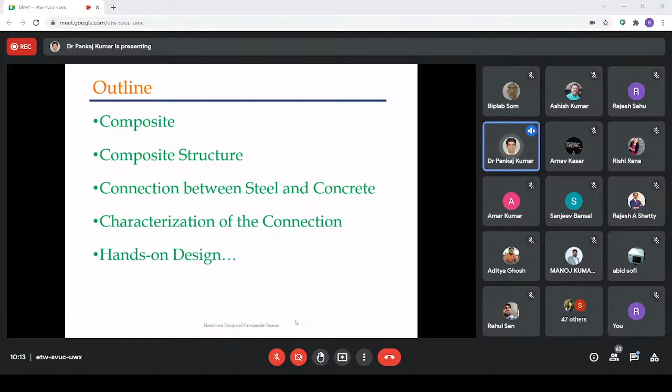Next we will discuss connection between steel and concrete, and after that characterization of connection. Whenever we ensure connection between steel and concrete to make them composite, usually there are different kinds of connectors available in the market, and we can also develop different kinds. How we can take the best advantage of each part, as well as perfect or complete capacity utilization of connections, based on our requirement. Sometimes we look into performance, sometimes strength, sometimes both aspects. In that case, which kind of connections are most suitable, because different connectors at the interface level of steel and concrete have different properties. At the end we will discuss one design example.

This is common whenever we look into steel concrete composites in civil engineering aspect. Firstly they were invented to accommodate large spans, because whenever we look into the largest spans, if we go with RCC, there are lots of challenges like the geometrical requirement, and the size and economy is also a concern.

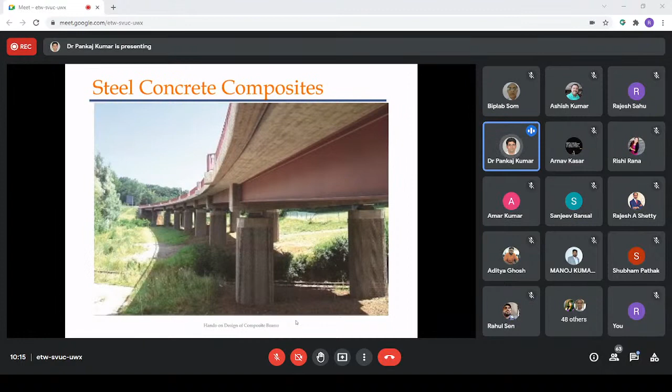If we look into the classical form of connections, usually at the initial development stage, likewise 70 years back in 1950 or early 60s, they started to make connectors, or connection between steel and concrete, at the start of steel concrete composite. They made it with reinforcement bars, but after that they found some challenges in it. There were resistance issues, and some uplift pressure also, because there was no resistance section. Therefore, they introduced headed kind of connectors to ensure the connection integrity between steel and concrete.

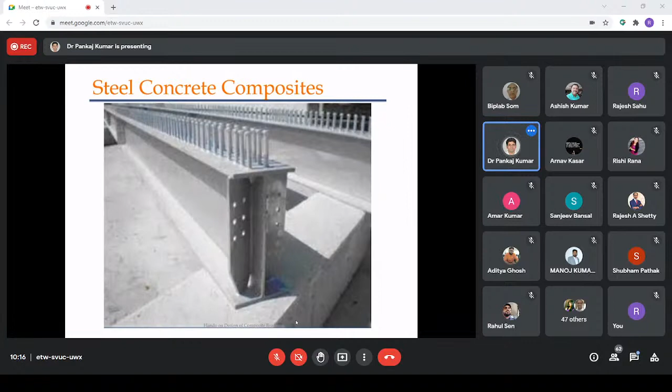In this particular picture, one steel beam is available, and at the top flange of the steel I-section, the mechanical shear connector, specially headed stud, is connected in two rows. These two rows are in line. We can connect them in staggered patterns also.

Therefore, steel undergoes deformation in the initial stage also. After a certain time period, once the concrete has hardened, it also contributes to strength, but at the initial stage there is no strength available, so the steel sections undergo deformation. To avoid that deformation in steel at initial stage, we usually use propped construction. If we are not using this vertical shoring, we can say it is an unpropped construction.

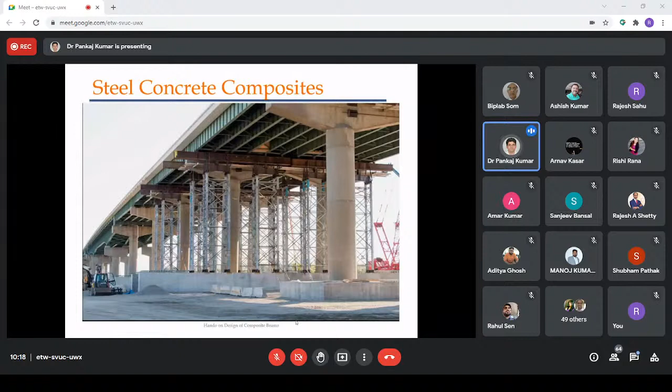Sometimes we use cambering also, but usually when moment occurs at the connection, cambering is not possible, and it affects the aesthetic view also, and it is difficult to provide a camber in such large sections. Therefore, we usually go for propped kind of construction.

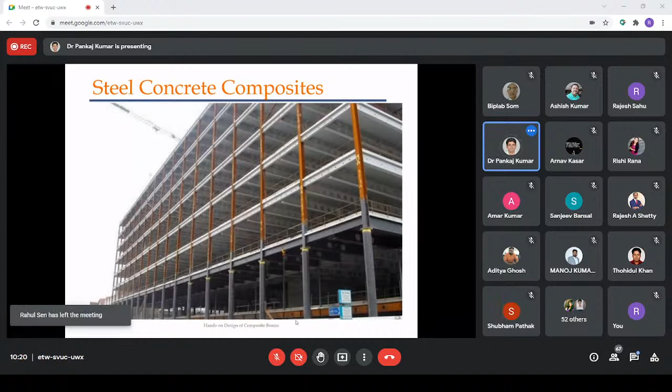When we are looking into steel, concrete, composite, we have two different components. One is steel and the second is concrete. If we look into these two components, we have different elements in each. If we look into steel, especially I sections, we have flange and web sections. Looking into concrete, we have reinforcement and plain concrete also. First we will discuss properties and some advantages, disadvantages and behavior of steel, and after that we will go for composite.

In composite construction, usually we are using steel, and we are using different kinds of sections. Some common sections are I sections, sometimes we use channel sections, sometimes angle sections, based on our requirement and sectional property requirement, or moment rotation requirement, or ductility requirement.

Looking into the advantages of steel: it has good reliability, industrial behavior, it requires lesser construction time, and because of that we get greater erection speed. Steel has higher strength in compression as well as in tension, and the strength in compression and tension is almost similar. Strength-wise, it is lightweight in nature.

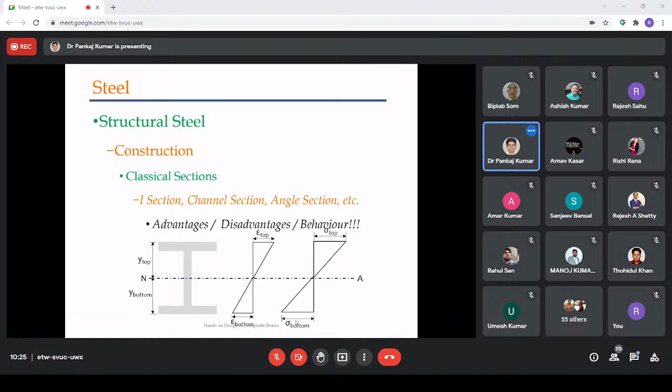Similarly, concrete, when we look into reinforced concrete, it is usually cast in situ. There are some advantages of concrete, like we can mold it into any shape and size because of its semi-liquid nature. Looking into availability of materials, we can get it locally, similar to steel as compared to steel sections. Steel sections have to be ordered and we get them from industries only, but we can generate or produce concrete locally, and it can be molded into any shape.

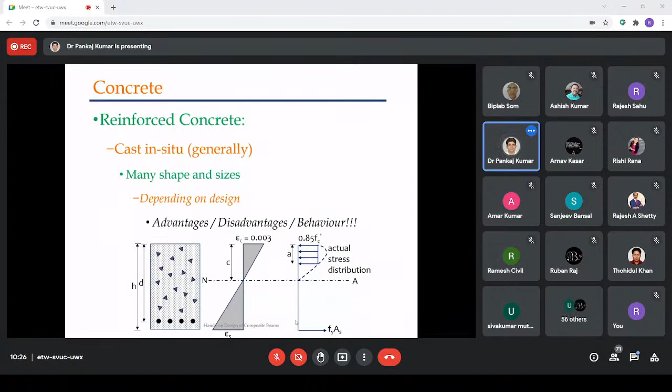Skilled labor is also not required. Similarly, if you look into steel connections, they require skilled labor. Again, as compared to steel, reinforced concrete has better fire resistance.

If we look into some aggressive environmental conditions, as compared to steel, concrete provides us better durability, and it also acts as a thermal insulator, requiring less maintenance.

Similarly, if we look into the disadvantages, there is no tensile strength. Concrete is very good in compression, as we know, but it shows very less strength in tension. Therefore, these are some disadvantages of concrete.

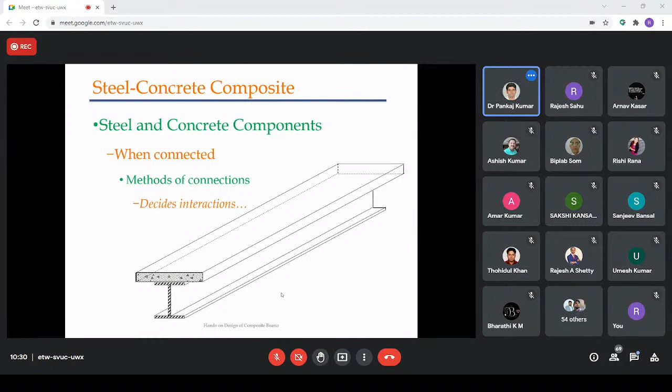So whenever we are talking about connectors, we are talking about shear connectors only. In some cases, if the deflection is very high, they are subjected under bending also, but more or less they are subjected under shear only. Based on interaction, we can decide how much amount of slip we are allowing at the level of interface.

So here we will talk about some advantages of composite over conventional reinforced concrete.

So first is high strength to unit weight ratio. If we construct an RCC beam with the same moment of inertia, we require a very high amount of concrete, and if we go for steel, we require lots of money. Therefore, to take the best advantages, we use composite, and because of composite, we get a high strength to unit weight ratio.

Next is flexibility in construction, which is also available in case of composites, and ease in construction, ease to repair, ease to retrofit, and it is partially reusable also. As we know, if there is dismantling going on in any steel concrete composite member, we can reuse steel. Steel is also a reusable material. Similarly, right now, because of advancement in concrete, concrete is also reusable, because they are using recycled aggregate and all.

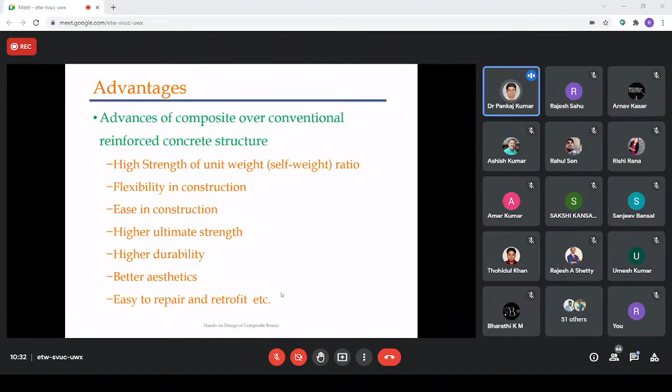Next is high ultimate strength, and one more thing is high durability, and we are getting better ductility as compared to concrete. That is again one of the advantages of composite over conventional reinforced concrete. This is also one of the advantages, because of the openings available in the steel beam web, we can insert all the utility pipes, all the arrangements within the beam portion only. This is not possible with conventional reinforced concrete systems.

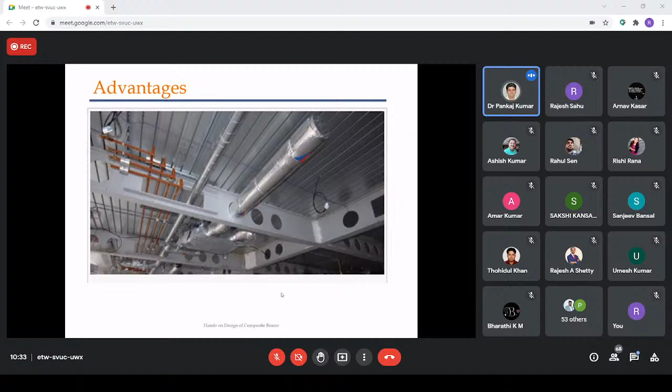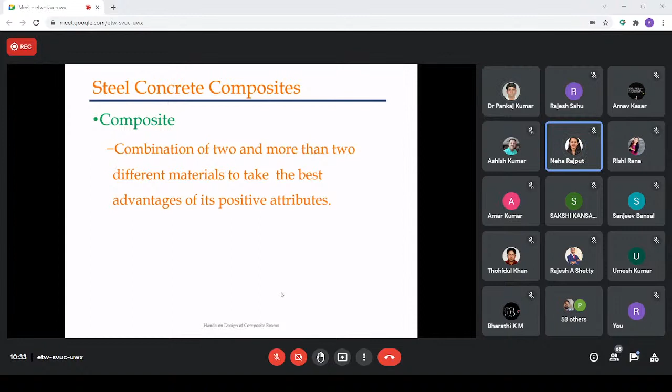So this is the typical definition of composite, when we combine two or more different materials to take the best advantages of their positive attributes, they are known as composite. And this is the comparison between composite as well as non-composite sections.

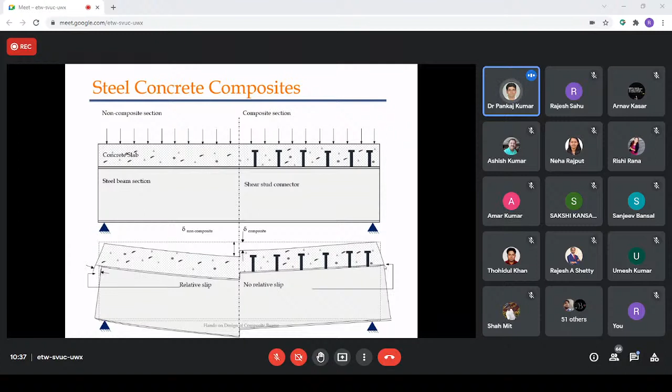Here is a point: non-composite beams show more deflection while composite beams show less deflection. Why is this? When we look at deformation, we are talking about moment of inertia. Deflection is inversely proportional to moment of inertia.

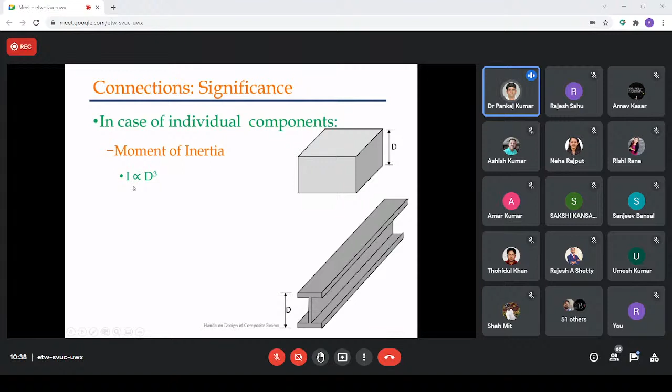If I take any section, rectangular, prismatic, or I-section, there is always some coefficient, but moment of inertia is directly proportional to d cube. If I'm putting a concrete slab directly over a steel beam, or two components one over the other without any interaction, the total depth equals 2d, but the moment of inertia is d cube plus d cube. So moment of inertia is directly proportional to 2d cube because there is no interaction between steel and concrete.

If I take the same section but with a connection, they act as a single unit. The total depth is still 2d, but now the moment of inertia is 4 times the previous one, which is 8d cube. So you get considerably lesser deflection compared to the non-composite section, because deflection is inversely proportional to moment of inertia.

With composite action between steel and concrete, the depth is not independent for concrete and steel separately, it is combined as 2D. Therefore I is directly proportional to 8D cube. Previously, for the same section with no connection, it was D cube plus D cube, which is 2D cube.

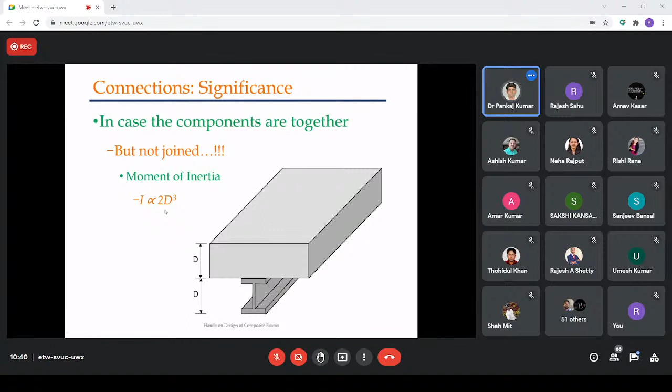That is why composite sections are more economical.

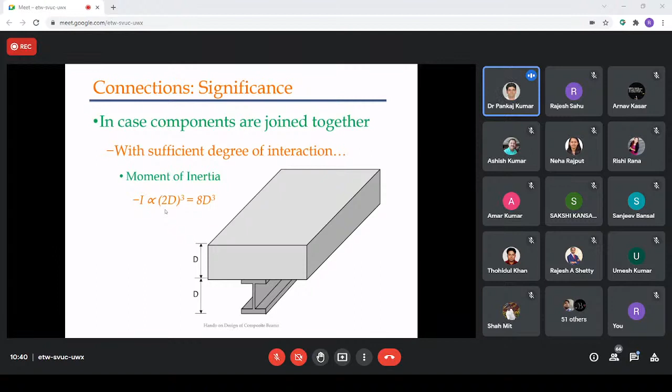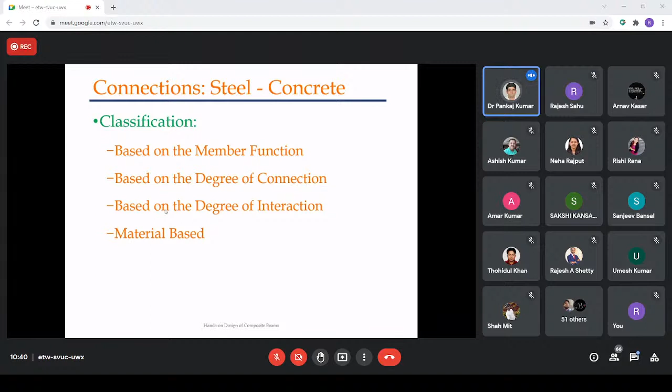Next is connection. We can classify the connection between steel and concrete based on four different criteria: member function, degree of connection, degree of interaction, and material type. Based on member function, since different members in any structure serve different purposes, we can construct sections using composite action but classify the connection based on member function.

The first one is a column in which concrete is encased with a steel hollow core steel circular section.

The second one is also a column section in which concrete is partially confined with a steel I-section.

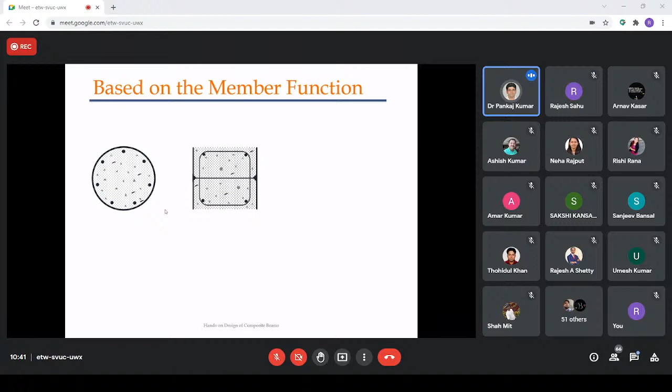The third one is a typical example of a steel-concrete composite flexural member or beam section, in which concrete is placed over a steel I-section and connected with headed stud shear connectors. The next one is also a typical example of a steel-concrete composite floor system.

As I showed in a previous slide, the third or fourth slide, we can provide some passive reinforcement below the concrete slab, or floor system. This profile sheet acts as your passive reinforcement, and the arrangement looks like this.

We can arrange it at different angles also, and based on that we can calculate the effective section of the composite member. In the case of profile sheets, we can arrange them in longitudinal rib placement, transverse rib placement, or oblique rib placement.

In this particular case, looking at the cross section, it is a longitudinal placement. If I rotate it 90 degrees, I get a different soffit height, and if I place it at an inclined angle, I get a different soffit height again. That is known as your haunch height.

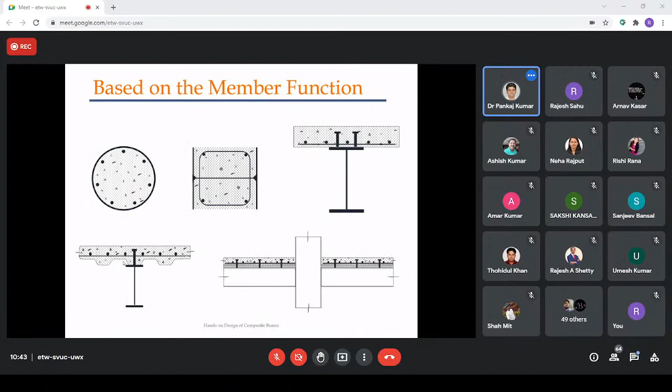So next is, this is based on member function. Next one is degree of connection. Degree of connection means, based on degree of connection, we can categorize connections into different categories. One is partial shear connection, second one is full shear connection,

and third one is no shear connection between them. So the degree of connection is totally a strength based criteria in which we are ensuring connection between steel and concrete, whether there is a connection available or not, and if the connection is available, then the strength of connection is higher than concrete or higher than steel or higher than both of them. If the strength of connector is higher than concrete or steel, in that case we can say the connection is full shear connection. And if the connection strength is lesser than minimum of concrete or steel, in that case we can say it is partial shear connection. You got it?

So as we know, degree of connection is a strength based criteria. It means we are calculating strength of three different members. One is strength of RCC or strength of concrete slab, second one is strength of connector, and third one is strength of I section.

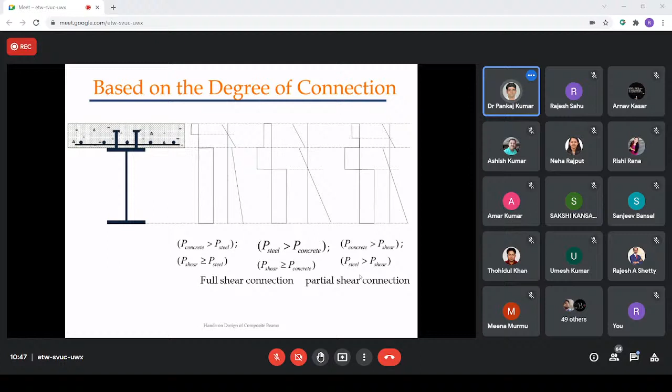Similarly, looking at the third case, strength of concrete is also higher than strength of shear connector, and strength of steel is also higher than strength of shear connector. Therefore, the shear connector will fail first. So this is known as partial shear connection. So therefore, whenever we are applying this, degree of connection can go beyond 1 also.

Similarly, if we look at degree of interaction, maximum value of degree of interaction is 1 and minimum value is 0. So degree of interaction is a stiffness based criteria. Therefore, we define it by slip at the level of interface. If I'm talking about slip, as we know, the change in slip is the difference of strain in steel and strain in concrete.

If I'm considering in the x direction, and denoting slip by s, then ds by dx, which is the change in slip, equals the difference of strain in steel and strain in concrete, es minus ec or ec minus es, anyway. So that is your strain.

So based on slip or change in slip, we can define three different kinds of degree of interaction. One is full interaction, second one is partial interaction, and third one is no interaction. In full interaction, what happens? The relative slip at the level of interface—although we are applying some connector at the level of interface—if we say there is full interaction, it means the stiffness of connection is infinite. As I told you, degree of interaction is a stiffness based property. Therefore, the stiffness at the level of interface is infinite, so there is no change in slip at the level of interface.

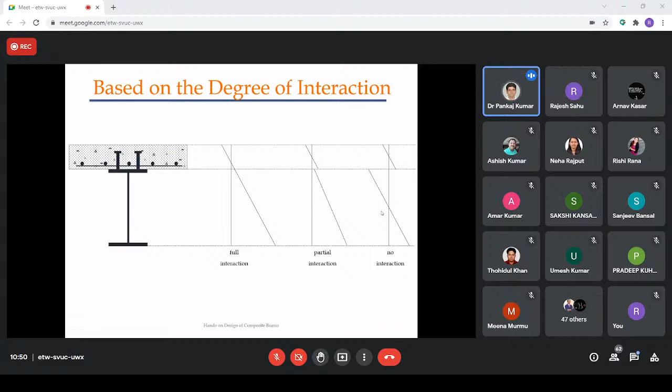There are some advantages of mechanical shear connectors and some advantages of adhesive connection also. Whenever we apply a mechanical shear connector, we get a semi-rigid or flexible kind of connection. But when we apply structural adhesive at the level of interface, our stiffness goes up to near infinite, so in that case there is no interfacial slip visible at the level of interface.

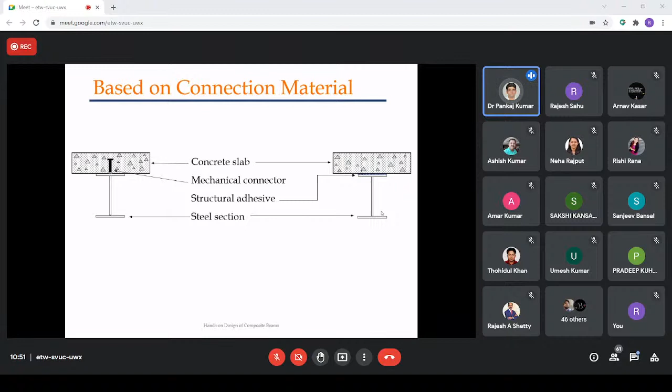So as I told you when discussing connecting material, one is mechanical kind of connector. They fall either under semi-rigid or flexible connector based on degree of interaction, and one is rigid kind of connection, which we can usually ensure by adhesive bonding. For that we can use any kind of epoxy bond, and this is also explained by the load relative slip curve.

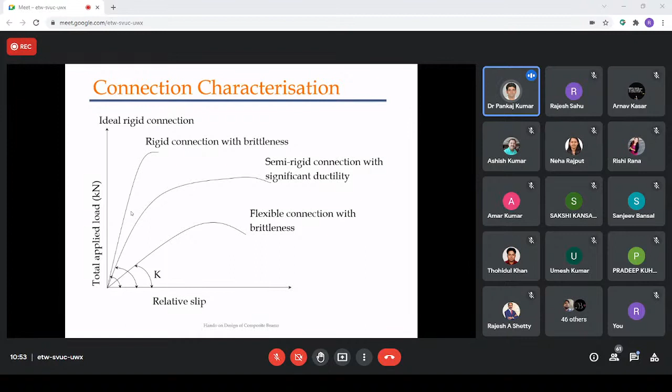If you look into the stiffness for flexible connection, it has brittleness, and the stiffness of the load-slip curve is very less compared to semi-rigid and rigid connectors. Moving upward, we get semi-rigid kind of connector, and at the end we get rigid kind of connector. Rigid connectors are very brittle in nature because they don't allow any relative slip at the level of interface, meaning the nature of the connector is brittle. If the connector is not brittle, it means it will allow some amount of stiffness-related deformation at the level of connectors.

Next is structural demand. For a structural member or structure, we need requisite stiffness, adequate strength, and sufficient ductility. These are the three demands of any structural member.

So we can ensure the requisite stiffness based on material, and that is based on elastic modulus, because as we know the slope of the stress-strain curve is elastic modulus, and that represents your elastic modulus, and the shape of the structural element also.

If I'm looking into adequate strength, that is based on member function, such as truss, beam, column, slab, beam-column connections, and so on. Different kinds of loading also affect the strength of the member, whether it is force kind of loading or displacement kind of loading. Some typical examples of different loading are static, cyclic, reverse cyclic, dynamic, impact loading, wind loading, and earthquake loading.

The next demand is sufficient ductility. So whenever we are looking into a composite material, we are looking for three different things: required stiffness, adequate strength, and sufficient ductility. These are the three key parameters to design a structural member at any level.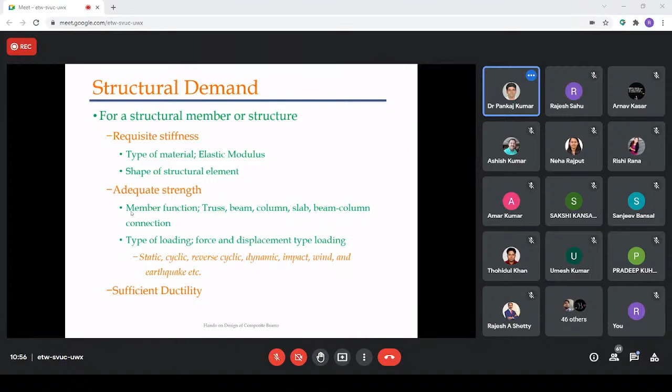This is about structural demand, stiffness and strength influence. If you are increasing the strength of connection, you are getting more strength, but you are getting lesser ductility. Based on that, three different kinds of structures are defined on the force deformation curve. As I told you, at the end, we will ensure the ductility in structural member.

So design criteria for ductility: one is analysis requirement, and second one is detailing requirement. Ductility, as we know, is the ratio of total deformation to yield deformation. This is the point from where initial yield starts to the ultimate point. This is the ratio of deformation between these two points.

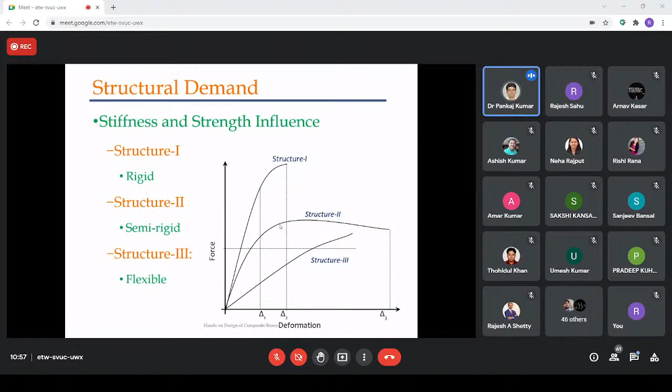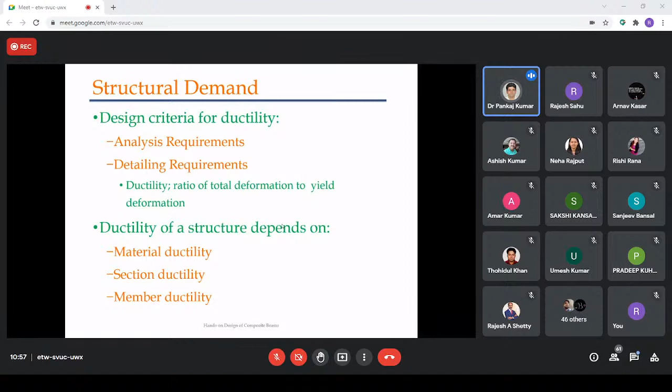We call steel as more ductile as compared to concrete, because we are getting very good ductility in case of steel. And ductility of structure depends upon, as I told you, material, cross section, member, and at the end we can ensure it in structural member also.

Next is different kinds of shear connection. As I told you, we can ensure the composite action between steel and concrete with the help of connection. If I'm looking into the connection, we have different kinds of connections. Based on material, we can classify them into two categories: one is mechanical and second one is adhesive bonded. In mechanical, we have different kinds of connectors, like channels connector, L-shaped connector, T-shaped connector, headed connector.

Demountable kind of connector is a new concept. It emerged in the last 10 to 15 years. There's also perfobond, T-perfobond, Cristbond, Y-shape, J-shape, and usually based on the requirement, researchers are developing different kinds of connectors.

The last one is adhesive bonded, because whenever you are inserting any kind of mechanical shear connector at the level of interface, you are getting some amount of stress concentration at that level. To eliminate the stress concentration issue, you can use adhesive bonded connections, but adhesive bonded connections also have some limitations.

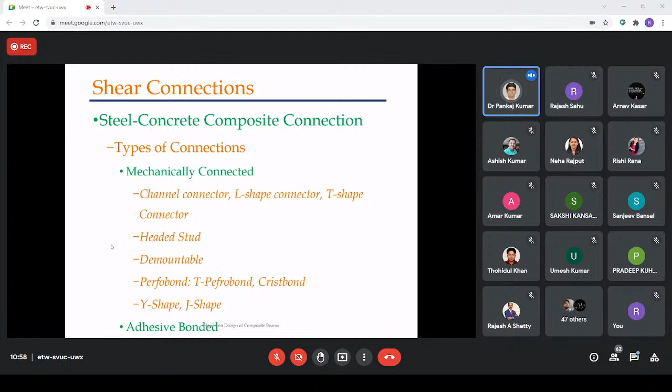Likewise, we can ensure the connection only between the interface. In mechanical shear connection, the connector is always embedded inside the concrete. Therefore, we cannot rely on the superficial property of concrete as well as steel. That is an issue with adhesive bonded kind of connection.

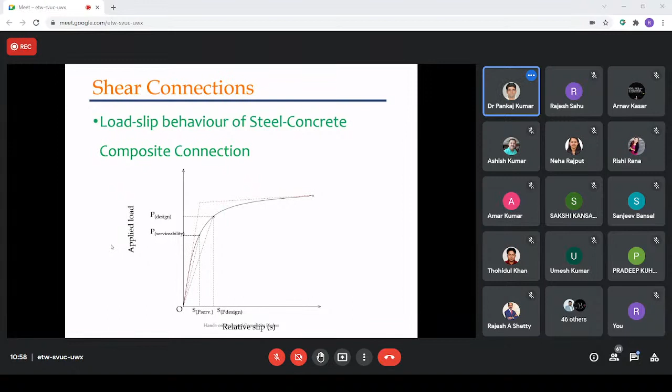This is the typical load slip behavior of composite connections. And these are the typical pictures of different kinds of mechanical connectors.

The first picture is angle shear connector. The placement of angle can be made in two different ways: one we can put parallel at top, and one we can put parallel at bottom. If you are putting it in the first position, or figure A position, you will get better resistance. If you are putting it in the second position, you will get lesser resistance, or you can say you will get more uplift pressure.

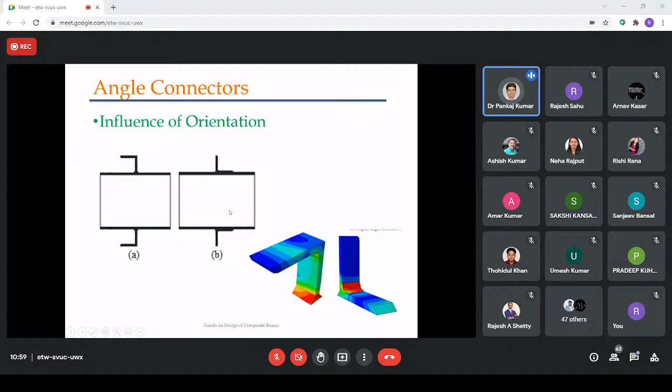Next one is channel shear connector. As we know, whenever the embedded part is more in concrete, we will get more strength of connection. So height of web is also one of the influencing factors in channel connector, width of web, thickness of web, otherwise they will fail in buckling. Concrete compressive strength is also an influencing factor, and deck geometry also.

So this is the typical kind of channel shear connector, and the orientation of channel shear connector is also one of the important parameters. If you are applying loading from one direction, you must ensure the orientation of the channel shear connector, in which direction it is more suitable, whether the open flange is towards the loading side or opposite to the loading side.

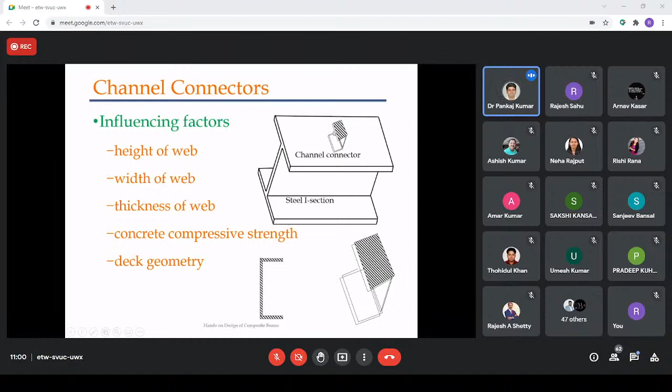This one is the headed shear connector. Why most commonly, engineers in practical practice are using headed shear connector, is because it has uniform resistance. The shape of headed shear connector is circular, therefore it has uniform resistance in all directions.

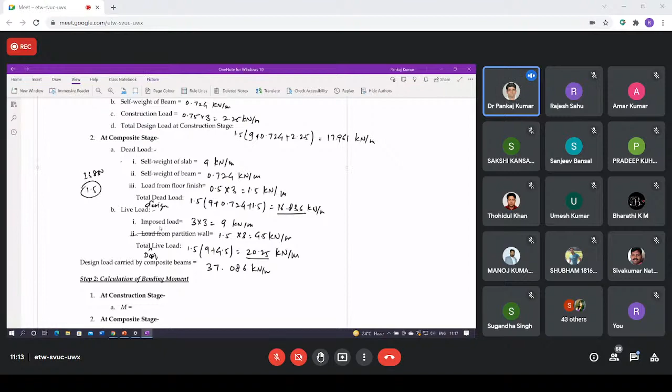So from, if we know the load, we can calculate the moment also. So if I'm looking into the moment at construction stage, as we know, the loading is UDL kind, because all of the loads are uniformly distributed. Therefore, we can say bending moment is usually WL square divided by 8. Therefore, for construction stage, the load is it is 17.961, multiplied by length. Length is also given. So I think in question it is written like 7.5 meter, right?

But here, to make it simple, I am considering 10 meter only. So we can say it is, we will get a value of around 224.51, right? Kilonewton into meter, right? Similarly, for composite stage, we can say it is 37.086 into 10,000 square divided by 8, same WL square by 8. So here we can say it is.

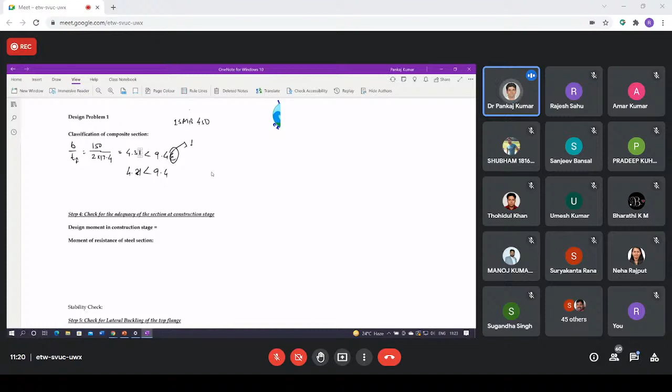Therefore we can say it is lesser than 9.4 into epsilon, and value of epsilon is again 1. Therefore we can say it is 9.4, and it is true. Therefore we can say the section is, and for plastic, but before ensuring plastic we have to check it for web with neutral axis at mid depth also. Here d by t is less than equals to 84 epsilon.

So if I'm looking into d by t, here d is 450, and specifically it is defined that d is the center to center distance between flanges. So it is 450 divided by thickness of web, which is 9.4, so we can say it is approximately 47.87, which is less than 84 epsilon. Value of epsilon is 1, therefore we can say the section is a plastic section, right?

So next step is check for the adequacy of the section at construction stage. So design moment in construction stage we have already calculated, it is 224.51 kilonewton into meter. So moment of resistance of section is

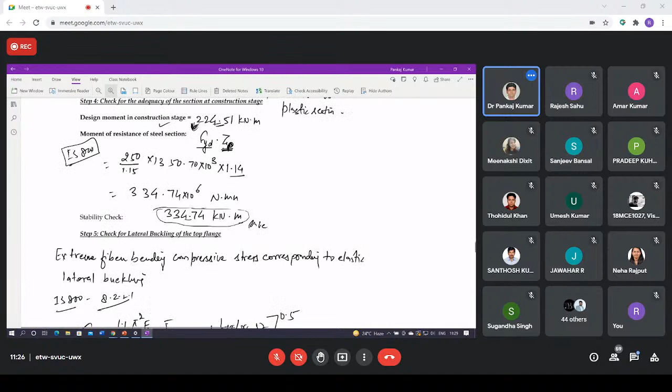So if I'm putting all the values in the formula, then FCRB equals 1.1 multiplied by pi square, which is 3.14 multiplied by 3.14, multiplied by E, which for steel is 2 into 10 power 5, divided by LLT, the distance between points of contraflexure. Since the case is simply supported, we are considering it as 1. The values are also given in clause 8.2.2.1 for different conditions, it may vary from 0.7 to 1.

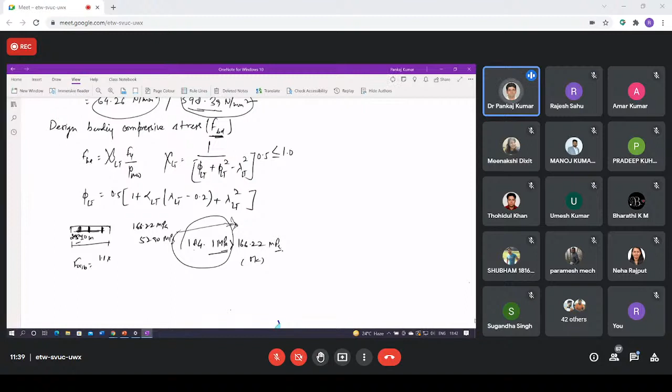So next is about effective width. It is, I think, written somewhere. Yes, it is. So it is about effective width, for bending moment at composite stage, as we know, bending moment at composite stage we have already calculated. It was 463.575 kilonewton into meter.

And for effective width, we have two different approaches: one we can calculate by Eurocode 4, and there is one more similar approach which is known as Ansourian's approach. So we can calculate, as Eurocode suggests, that the effective width is 1/4 of span, and here span is maximum distance between point of contraflexure. So we can say it is effective span divided by 4, right? And we have one more constraint in effective width, which is center to center distance between beam. So it means it is either span by 4 — as we know in our case it is simply supported, so it is 10,000 divided by 4, so we can say 2,500 mm.

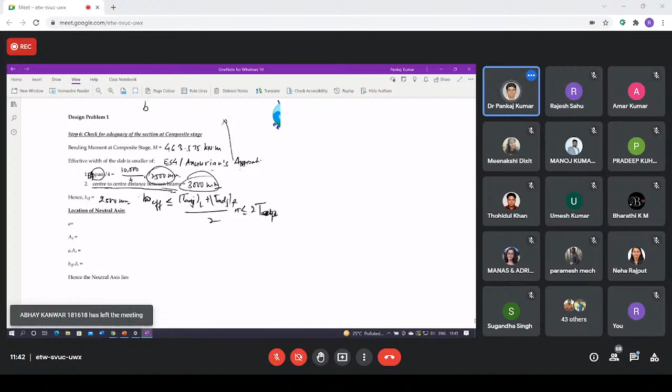There is one more approach which is Ansourian's approach, and it is based on T adjacent divided by LC ratio. If it is less than 1, there is a different formula, and if it is more than 1, there is a different formula, and it shows slightly conservative results as compared to Eurocode 4. So it is B effective by T adjacent divided by 2 equals to 1 minus 0.6 T adjacent divided by LC, if T adjacent by LC is less than or equal to 1.0, and if it is more than 1, in that case it is 0.2 LC. So it is slightly conservative because earlier we were taking 0.25.

So next is location of neutral axis. To calculate the location of neutral axis, we have to calculate the ratio of stresses. In steel, we are considering 0.87 Fy, and in concrete, we are usually considering the equivalent area of stress as 0.36 FCK. So it is 0.87 into Fy (250) divided by 0.36 multiplied by FCK (30), so we can say it is 20.1. And the cross section area for steel is given as 9227 mm square.

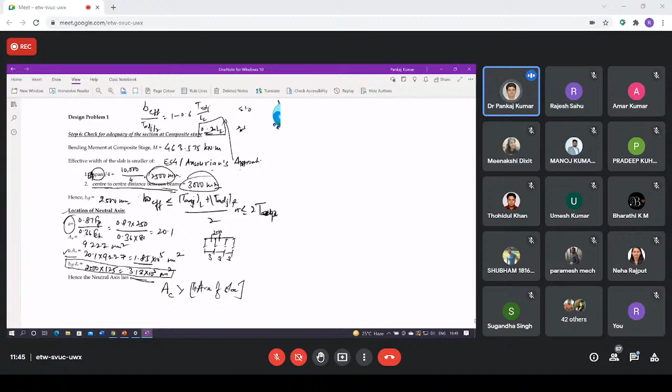So as we know, this one is higher than equivalent area of concrete is more than equivalent area of steel. So therefore, we can say neutral axis, if the area of concrete is higher equivalent area, in that case we can say now the neutral axis lies in concrete only, right? This is about position of neutral axis.

Next is about position of neutral axis. So if I'm looking into the position of neutral axis, we can compare compressive forces with tensile forces, and from that we can get position of neutral axis, just same as your RCC.

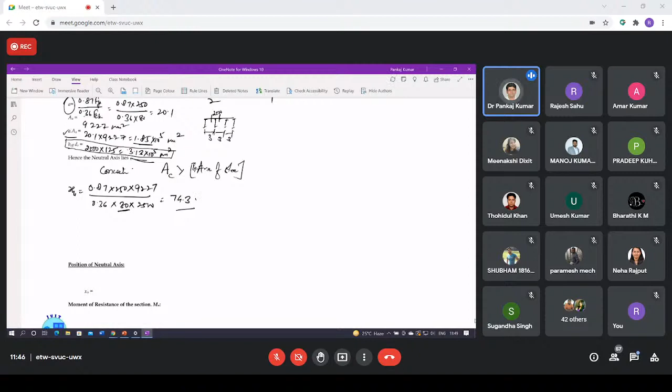So it is 0.87 into Fy into area of steel, which is 9227, divided by 0.36 into 30, that is grade of concrete, multiplied by 2500. So from here we will get 74.3 mm, and which is from top. So next we can calculate. So the position of neutral axis is 74.3 mm from top.

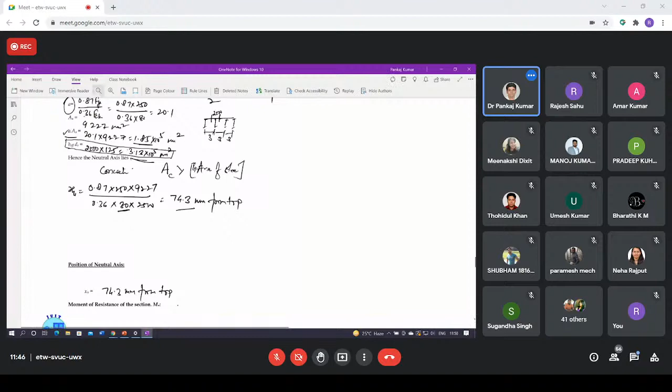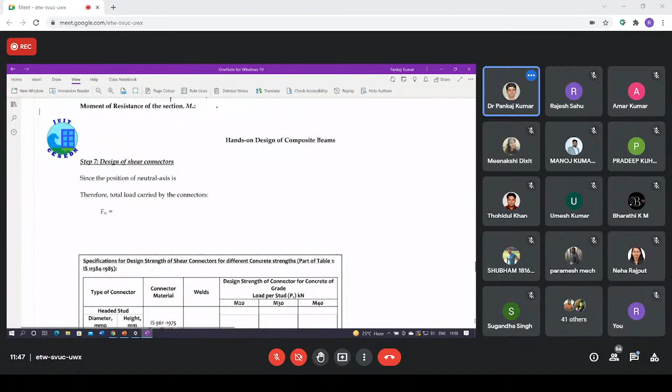Moment of resistance we can calculate.

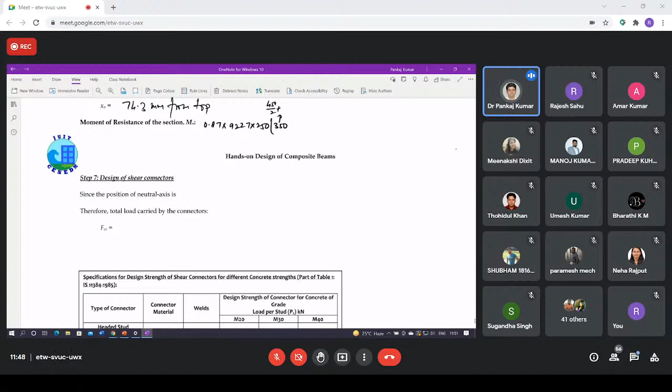If I'm looking into the steel side, it is 0.87 into Fy, As which is 9227, multiplied by Fy and multiplied by distance from neutral axis of steel to CG, which is 350. From where we are getting 350: it is 450 divided by 2, plus 225, plus 125 depth of concrete, minus 0.42 XU, right, and the XU is 74.3.

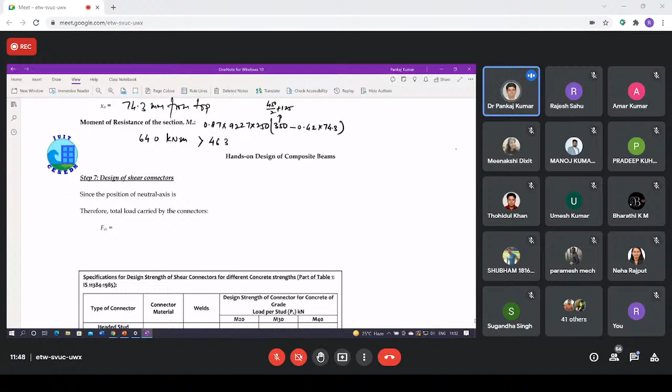Therefore, from here we will get a value around 640 kilonewton into meter, which is more than design moment in composite stage, which we wrote on stage 6 at the initial point. It is 463.575 kilonewton into meter. Therefore, we can say it is okay - it is okay in composite moment of resistance in composite, as well as in construction stage.

It is okay. Next is design of shear connector. Since the position of neutral axis is in concrete, therefore we can calculate total load carried by connector by 0.36 FCK B effective into XU. Here, 0.36 into FCK is 30, and B effective is 2500, and XU is 74.3. So from here we can say it is around 2006.1 kilonewton. So this is about the load which must be governed by connector, right?

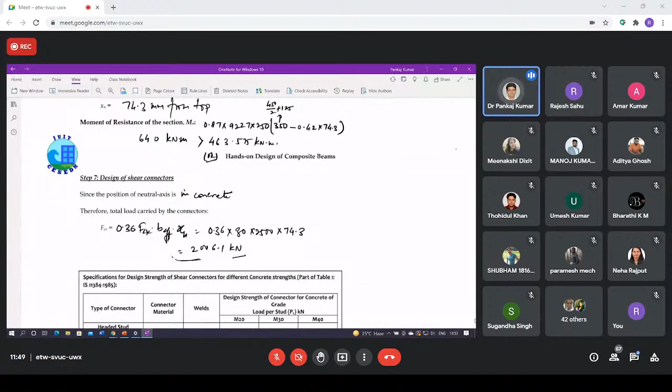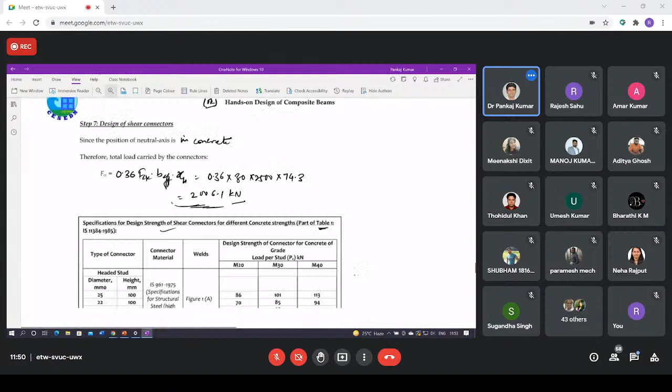So if you are looking into this particular table, which is taken from IS 11384, this is table 1 which gives the value for design strength of shear connector. So from here you can take any size of connector. Just a second, it is little bit slow. Yes, it is visible, hopefully.

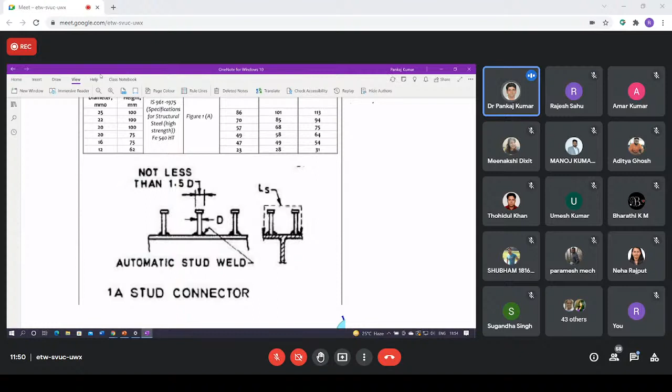So these are the different grades of concrete, for grade M20, for M30, because as we know, if we are increasing the grade of concrete, the resistance must increase. So therefore, based on that, the strength capacity of connector also increases. So if you are looking for 25 mm headed shear connector diameter having height 100 mm, for M20 grade the design strength is 86, for M30 it is 101, and for M40 it is 113.

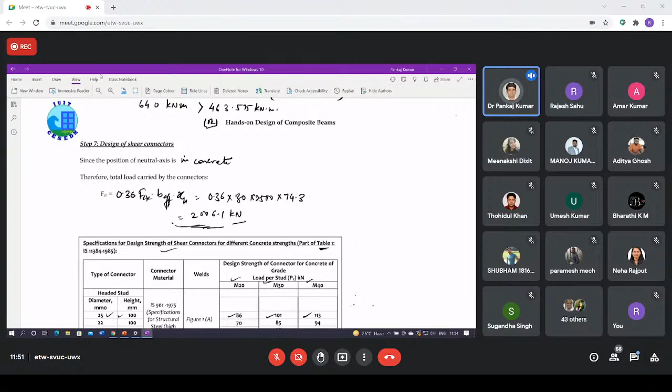Similarly, for 22 mm with different dia, it has different values. So in this particular case, I am taking 20 mm headed stud with 75 mm height, and the grade of concrete given in question is M30. Therefore, the design strength of connector is 58.

And usually, if you know the ultimate strength of concrete, usually in plastic design, we are taking 0.8 times of ultimate strength, which is usually we are defining as strength of connector by D. So if you know the actual strength, in that case you can take it as 0.8 of D also.

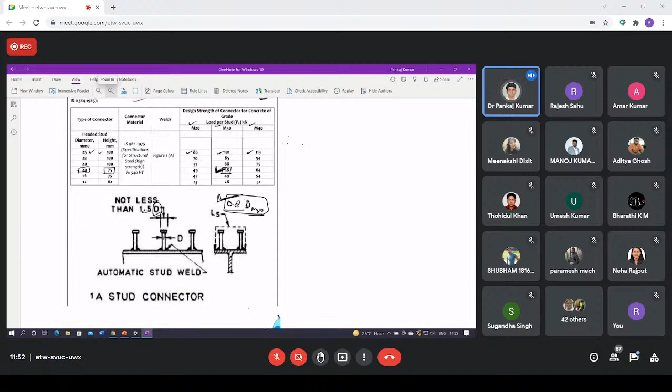Don't confuse with this D, this is about diameter. Usually, if you look into the particular geometry of the connector, the head diameter is 1.5 times the shank diameter, and the spacing between two connectors should be more than, for different criteria, 3D to 6D. This is also given in IS 11384.

So as we know, we are selecting a 20 mm diameter headed stud with 75 mm height, so the design strength equals 58 kilonewton. Therefore, looking into the total number of connectors, as we know the total force is 2006.1 kilonewton. Dividing it by 58, I get the number of connectors, approximately 34.58. So I can say I will provide 35 connectors.

Next is about spacing. There is one important point whenever we look into the connectors. As we know, whenever we talk about shear, it goes like this. We are providing 35 connectors in half of the span. If the total span length is 10 meters, we will provide these 35 connectors in this L by 2 span, or we can say 5-meter span only. So the total connector requirement is 70, not 35, that is 35 into 2, which is 70 numbers.

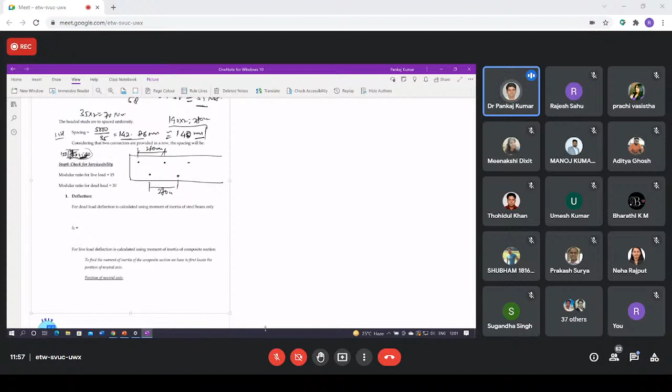And this is about deflection. As we know, for simply supported beams, if UDL is acting over it, deflection is 5 upon 384 WL4 upon EI. So I for steel is given, because initially if the deflection is governed by steel in dead load, we can calculate it by moment of inertia of steel. If we look into live load, we can go for composite, so we have to calculate moment of inertia of the composite section also. Based on that we can calculate deflection and stresses.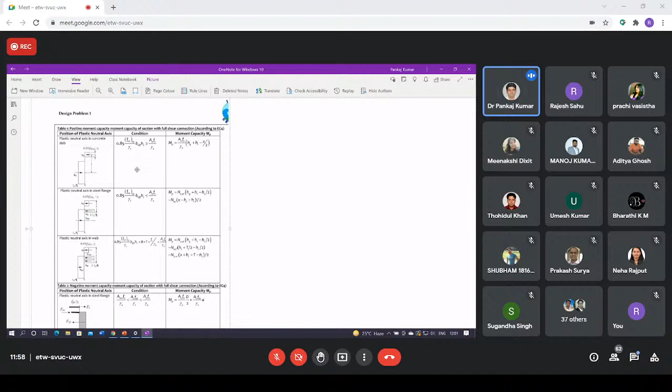At the end we can calculate shear, and based on that we can provide reinforcement also. These are, as initially I explained, some part. So if the position of the neutral axis is in concrete, at the interface level, or at the web of the steel, in that case how we can calculate moment capacity and position of neutral axis, these are given. So that is all from my side, if there is any question.

Thank you, Dr. Pankaj, for this wonderful session. Once again, sorry from my side, it was too lengthy and we could not complete one problem in this two hour duration. That is an issue because in composite we have lots of aspects to consider. That is understandable, we had a tall order in front of us in a very limited time. But I hope all who have attended could benefit a little bit from the design that you have explained very efficiently.

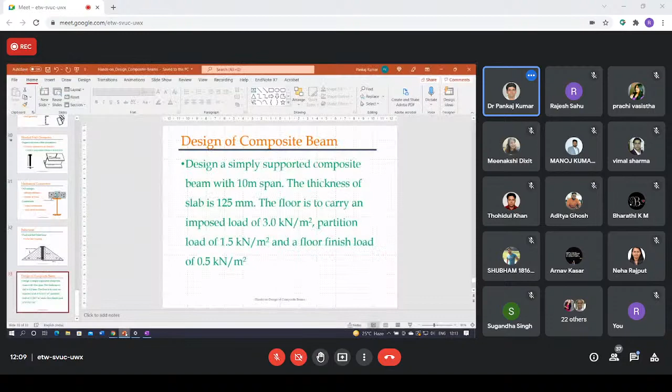In degree of connection, you are confused with the term used both in shear as well as in concrete and steel, since we are writing the same notation P, right sir? Yes, Dr. Pankaj. So is there any confusion about the strength? That is not about shear strength of concrete or steel, it is about the capacity of concrete and steel available at that cross section. We are considering shear strength only for the headed stud connector. So although the notation written is almost the same for all three, P, it is different.

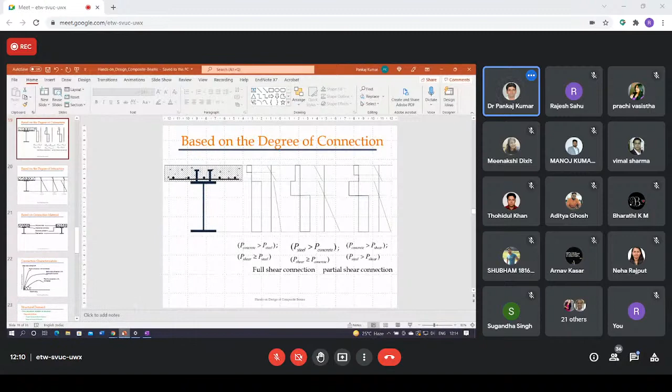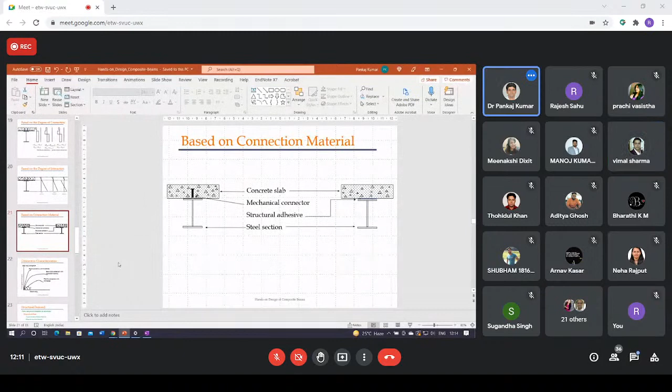Okay, the next one is slide number 22. Yes sir, 21 or 22. This one, slide 22. Yes, this is it. Okay, and so the rigid, okay, that is different. Yes, load slip curve.

Could you please give your opinion on this? Dr. Pankaj, he's probably asking for an illustration on this curve. Why different lines for different curves? So if you are looking into the connection, you are talking about connection characterization. Yes, he is, sir.

The first line is a load, applied load versus relative slip curve. There is a vertical line which shows ideal rigid connection, meaning there is no slip, or at the level of interface there is infinite stiffness available. The second one is about rigid connection with brittleness.

So likewise, if you are looking into rigid, flexible and semi-rigid kind of connection, as per IS classification, they are defining with 6mm slip. If the slip is more than 6mm, they are defining it as a flexible kind of connection, and if the slip is lesser than 6mm, they are defining it as rigid connection. That is about type of connection, which is flexible, rigid, semi-rigid, and ideal rigid kind of connection.

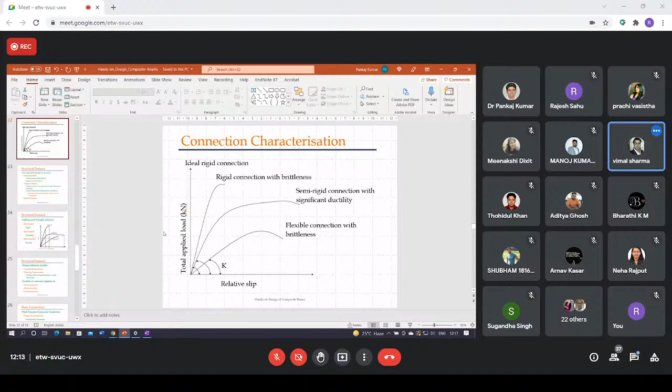Dr. Pankaj, I have a question on the same slide 22. Could you please elaborate on the flexible connection? Like, what are the examples of a flexible connection?

Likewise, headed stud connectors, if they are placed at a distance like 10D from each other, they are a flexible connection because they show significant slip at the level of interface. As per IS, if the slip is more than 6mm, usually we are getting more than 6mm in case the beam span is more than 4 meter and 5 meter. In some cases there are lots of practical examples as well as researcher problems available, in which they are showing slip around 10 to 12, 12, 15, 22mm. So that is usually known as flexible connection.